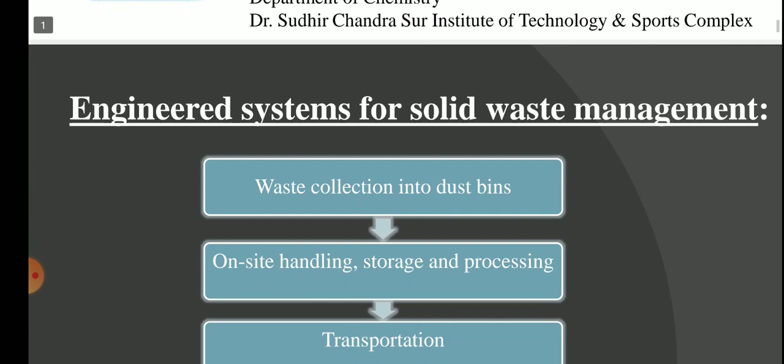So yes, today we will discuss mainly on the composting process, but in sideways we will discuss the other processes also.

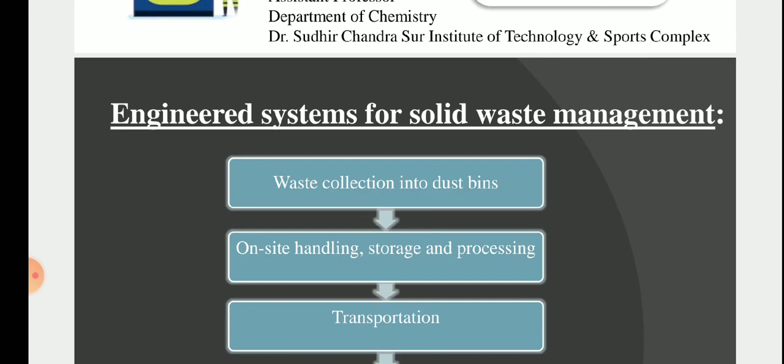So here is the system of solid waste management, that is the steps. First of all, the waste collection into our dustbins, then on-site handling, storage and processing. Obviously the collection and other processing, and they are stored in a particular place.

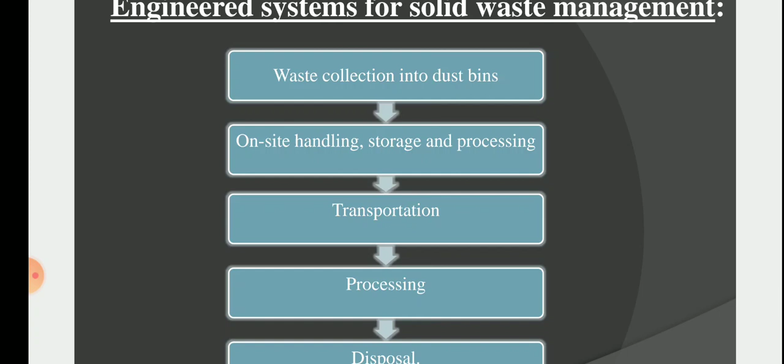Then there will be a separation, and sometimes transportation is required, because if you take it to your processing unit, then processing, and lastly the disposal. So these are the main steps.

Now there are different methods for the treatment of solid waste, or solid waste management. With different types of waste, different treatments are to be done, because organic and inorganic waste material is possible. So yes, we can reuse them, we can dispose them, we can make compost by using them. So there will be different techniques or different types for solid waste management especially.

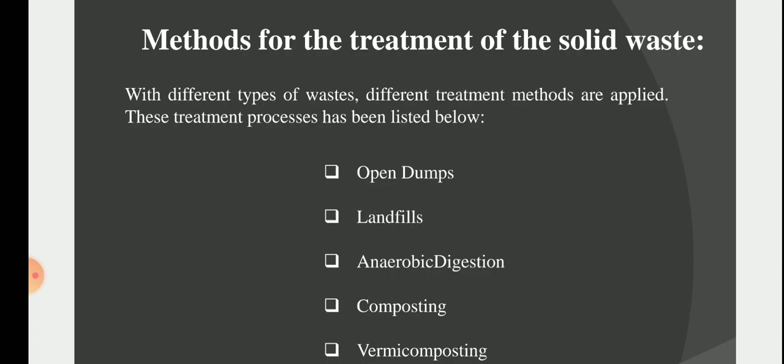Number one is open dumping, that is the waste are thrown in open space, and all the city solid waste are stored at that open space, that is called open dumping. Now second is the landfill.

Here in the landfill, some lower field or low level land is filled with this solid waste. Now another is the composting.

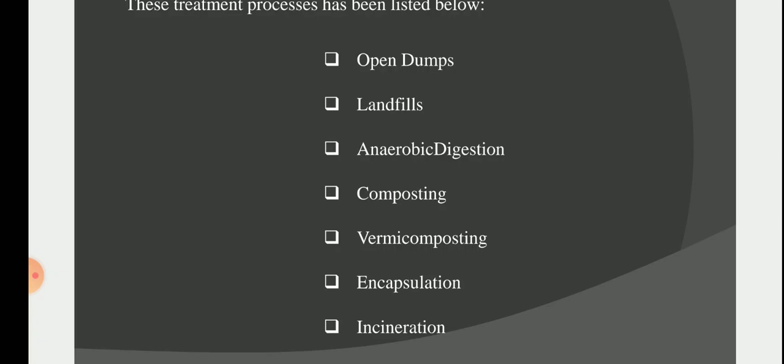Yes, we'll discuss about this. Then vermicomposting, then encapsulation, and the last one is incineration. We'll discuss one by one, and the last one is very important, that is incineration. This is mainly used for bio waste. They are damaged at high temperature, nearly about 1000 or more than that, by using this type of system oven.

Now first we will discuss about open dump or open dumping. So here you will look into the picture, that all city waste products are carried and stored in a particular place, and in our city you know that the Dhapa is that place.

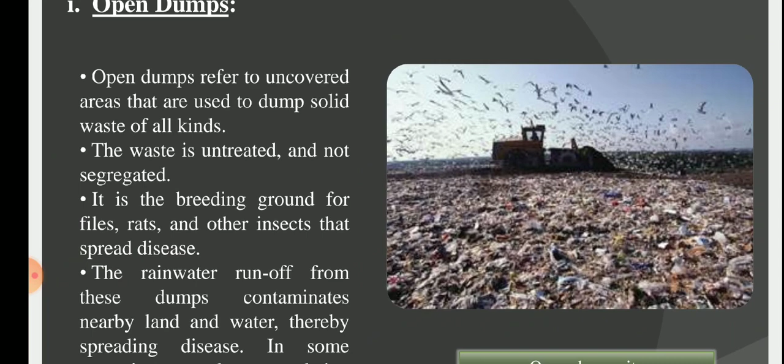So here all the waste material is thrown or dumped in open air, and here no treatment is done. So basically the waste material is not taken care of, or any other processing is not taken. So it is not the right way, student, to dispose the waste.

So here, different kinds of waste are accumulated, organic, inorganic, etc. So this is the breeding ground for flies, rats, and other insects, so that can spread different kinds of disease, serious diseases.

So again, in the rainy season, the rainwater runoff from this dump contaminates the nearby land, and also the water system, the canal and other systems, and then the spreading of disease happens by means of this. So this open dumping is not recommended for a particular city, because it is not a good way. Yes, this is a very fast solution to remove the waste material, but it is not good.

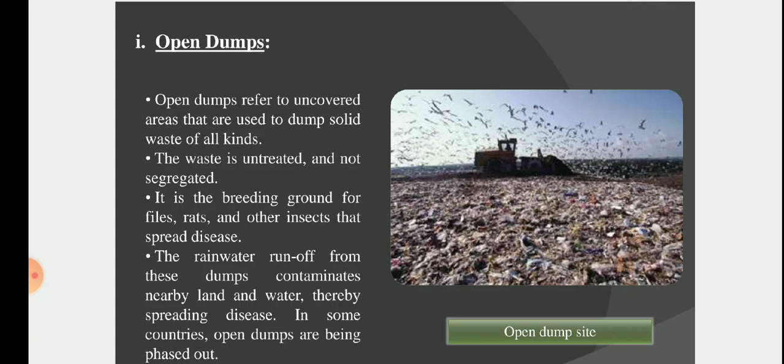Then the landfill. Here we carry the solid waste material and fill a lowland, so the ground can be used for a specific purpose, such as building a house. But again, it is not good, because if you do not segregate the waste material, a number of the waste materials may hamper the environment in future. So you must take care of that.

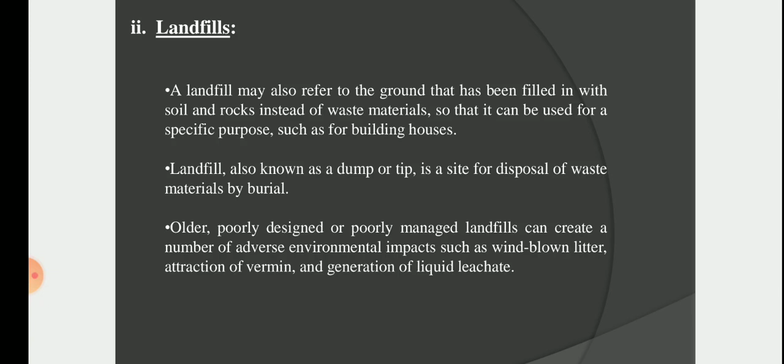So now, landfilling is a site for disposal of the waste material by burial. Basically, we take the waste material to the low land, then put soil above them. Again, I am saying it is not a good process. An older and poorly designed and poorly managed landfill can create a number of adverse environmental impacts, such as wind-blown litter, attraction of vermin, and generation of liquid leachate. Since it is not properly managed, they just cover it up with some soil.

Now this is a very important part of solid waste management, and this technique is maintained in most countries and most cities. This is the green approach.

Composting is the biological decomposition of organic waste under controlled aerobic conditions. Organic compounds are sometimes called biodegradable material. If we place biodegradable material or organic compound, a defined kind of bacteria present in our environment decomposes it. Due to this bacterial decomposition, the organic material decomposes, and if we do this in a controlled way, following an engineering process, we can use it as a fertilizer, that is compost.

Industries such as paper, agriculture, and food processing give out waste which is almost 100% organic, and waste also comes from our everyday life at home. Lots of that is organic product, and it ultimately generates good compost. If you look into the picture, you will see that.

First, here is the carrot. In our kitchen, we use the carrot stem, then throw away the leaves, and it goes to the dustbin. If you segregate this kind of thing—not only this carrot but lots of vegetables that we throw into the dustbin—and collect that organic part, after particular processing it creates this compost. Now we can use this compost in the agriculture field for growing carrots again. So this is a nice recycling process, and it is a completely green process.

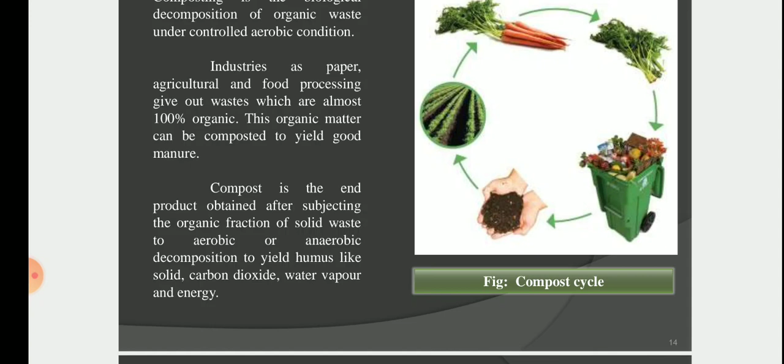Compost is the end product obtained after subjecting the organic fraction of solid waste to aerobic or anaerobic decomposition to yield humus. There will be moisture present in this solid material or soil, along with carbon dioxide, water vapor, and energy. That's why it is called humus, and it is a very good fertilizer.

So what is the process for making compost? There are different stages of composting. First, you have to separate the solid waste—that is, segregation of the solid waste. You remove the inorganic material that is not biodegradable, and separate the biodegradable or organic material. Then there is processing of the compostable matter and preparation for compost, after which it is taken into a container, followed by digestion, curing, and screening.

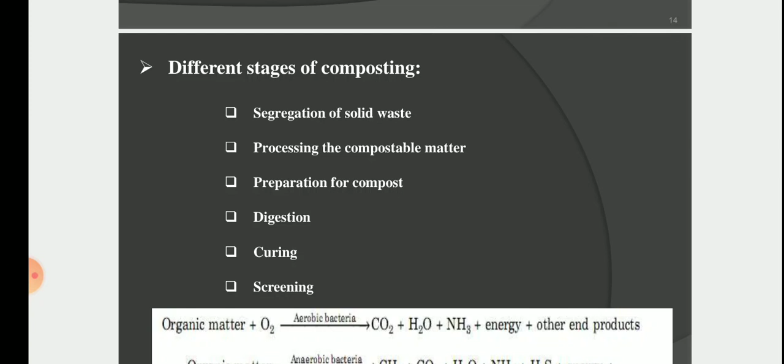Basically, it needs 15 days to 1 month to process this bacterial decomposition. Here, organic matter in the presence of bacteria and free air—that is, oxygen, which should be a limited source—is decomposed. After decomposition of the organic compound, it produces carbon dioxide, water, ammonia, and other gases, along with energy and other products.

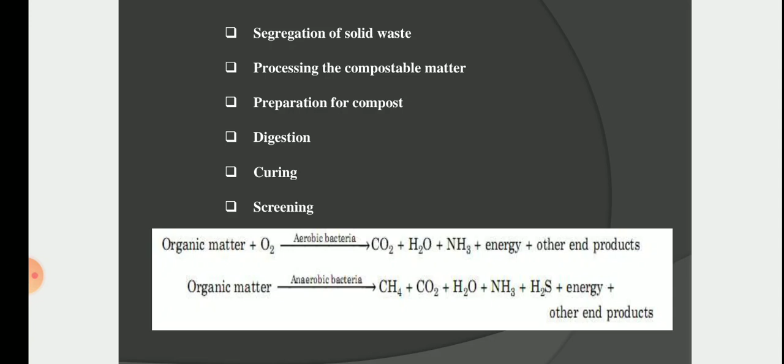These are the chemical processes that occur during the formation of compost. Aerobic bacteria mainly work in this process, but sometimes anaerobic bacteria also take part in this decomposition and also produce compost.

This is the growth of temperature. First, at temperature 30 to 35 degrees it forms a mesophilic material, and at 60 degrees moderate thermophilic, and at 80 to 90 degrees extreme thermophilic bacterium, that is compost. So compost is a very complex process involving the participation of several microorganisms like bacteria,

actinomycetes, and fungi. So mainly bacteria, fungi and other microorganisms take part in this process. The bacteria bring out the decomposition of macromolecules, namely protein, lipid, and other things. So fungi can degrade cellulose and other organic complexes.

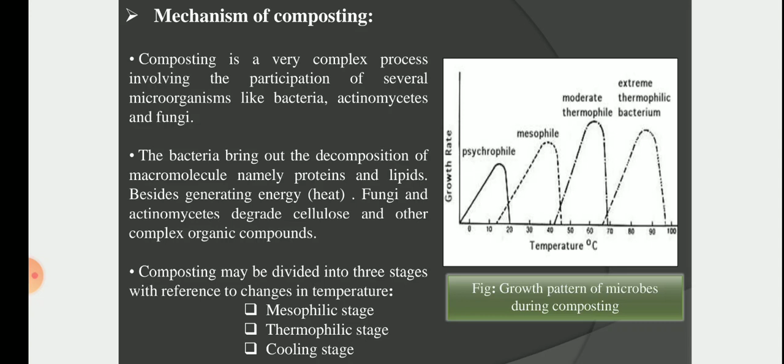So composting may be divided into three stages: the mesophilic stage, thermophilic stage, and cooling stage. Sometimes it becomes heated, and then after cooling we can use it as compost.

Now, anaerobic digestion is a regulated version of the natural event of landfill and other things. So in biogas, it sometimes creates biogas which is a potential renewable energy source. It is carried out in a large fermentation tank, because here a tank is required. Gobar gas is an example.

In this tank, solid waste is taken in absence of oxygen, and anaerobic bacteria convert large organic molecules mainly into methane and carbon dioxide. You know that methane acts as a

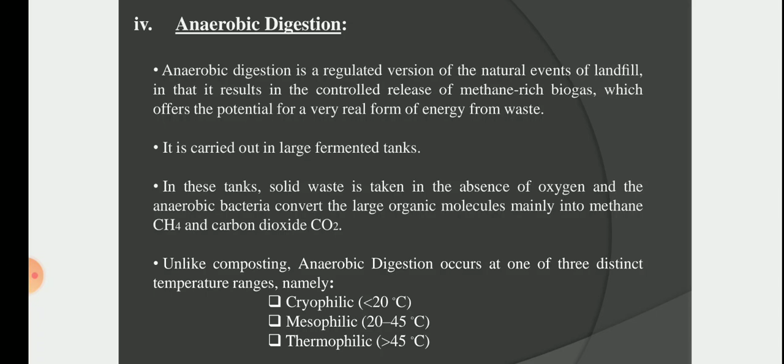gaseous fuel. So unlike composting, anaerobic digestion occurs at three distinct temperature ranges: cryophilic below 20 degrees centigrade, mesophilic at 20 to 45 degrees centigrade, and thermophilic above 45 degrees centigrade.

Microorganisms involved in anaerobic digestion: here no oxygen is required. Hydrolytic fermentative bacteria, so basically here hydrolysis takes place. An example of this type of bacteria is Clostridium. Then acetogenic bacteria, here it breaks the acetyl bond.

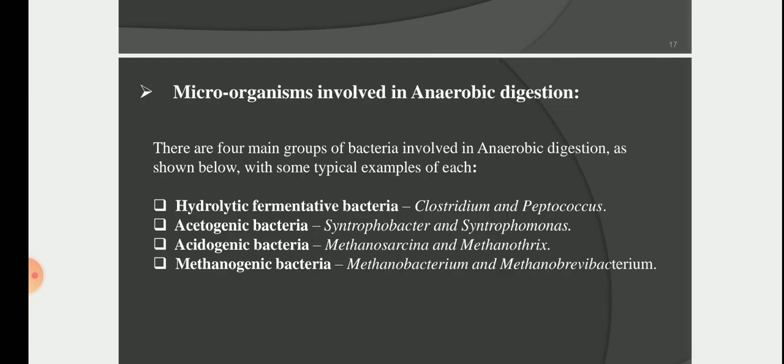Syntrophobacter is another acetogenic bacteria, where some acidic reaction takes place. Methanosarcina and methanogenic bacteria - here methane is produced - methanobacterium. So these are examples of anaerobic bacteria.

So the digestion process is applicable for both aerobic and anaerobic processes. The digestion process mainly involves hydrolysis, acetogenesis, then methanogenesis.

So the complex organic compound, after hydrolysis by hydrolytic bacteria, forms monomers, that is glucose, fatty acid, glycerol.

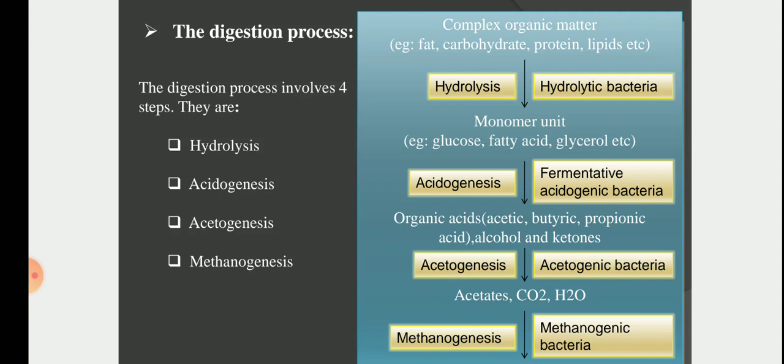Then in acidogenesis, fermentative acidogenic bacteria act, and acetic acid, alcohol and ketone are formed. Then in acetogenesis, acetate is formed along with carbon dioxide and H2O.

Then methanogenesis occurs with methanogenic bacteria, which form methane, carbon dioxide and water.

Another aspect of solid waste management is vermicomposting. Vermicomposting is a simple biotechnological process of composting in which certain species of earthworms are used to enhance the process of waste conversion and produce a better end product.

So it is the same as the above composting. Here we use certain species of earthworms which are used to enhance the rate of formation of the compost, or its quality.

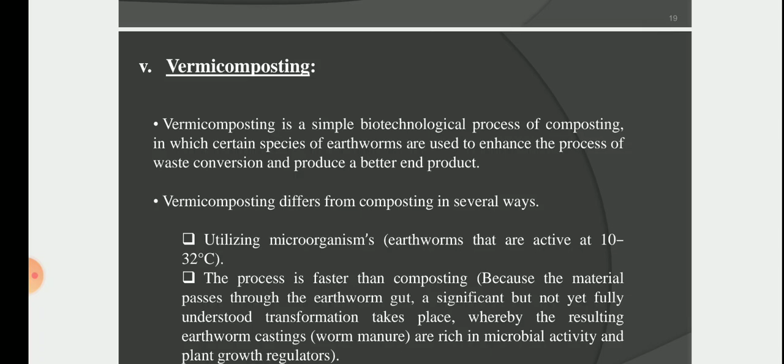Utilization of microorganisms occurs at 10 to 32 degrees centigrade. Then it is similar to that.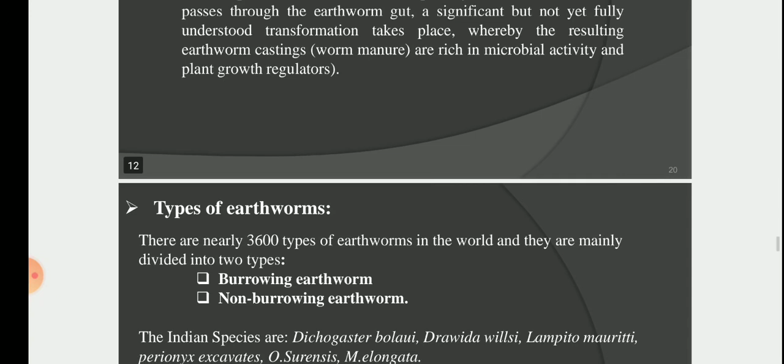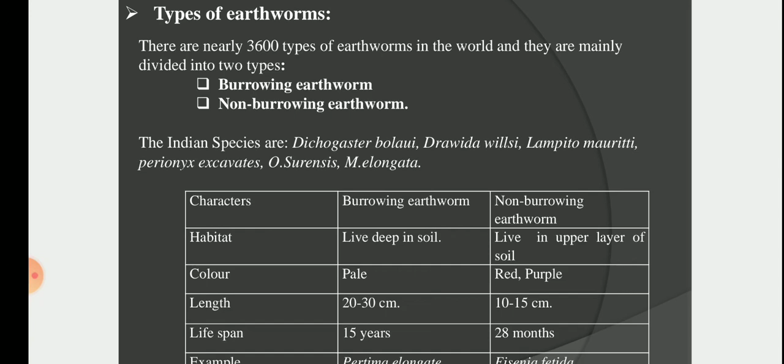Regarding types of earthworms, there are nearly 3,600 types of earthworm in the world. They are mainly divided into two types: burrowing earthworm and non-burrowing earthworm. There are lots of examples you are seeing here.

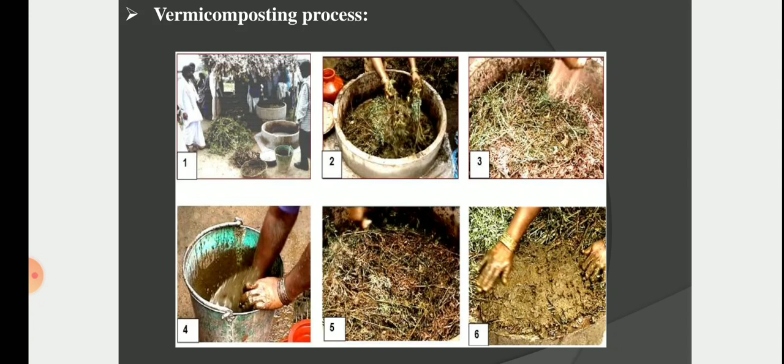This is the vermicomposting process, mainly using cow dung and other things, that is some weeds and other material. From that we can make compost and also get methane gases.

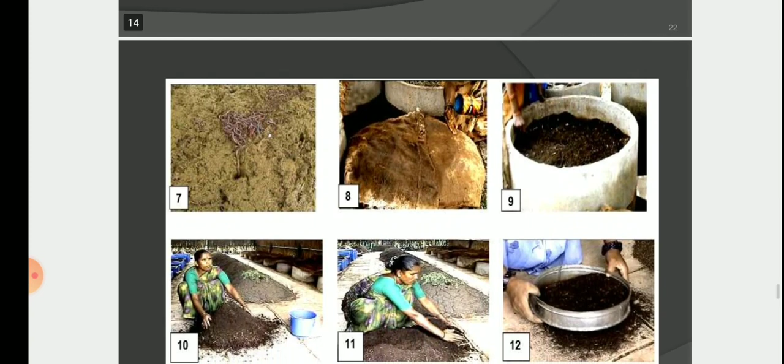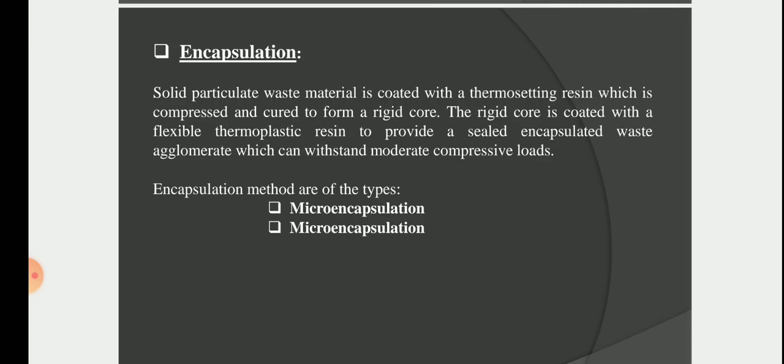So in encapsulation, all the things are taken in a particular container with thermosetting resin, which is compressed and cured into a rigid core.

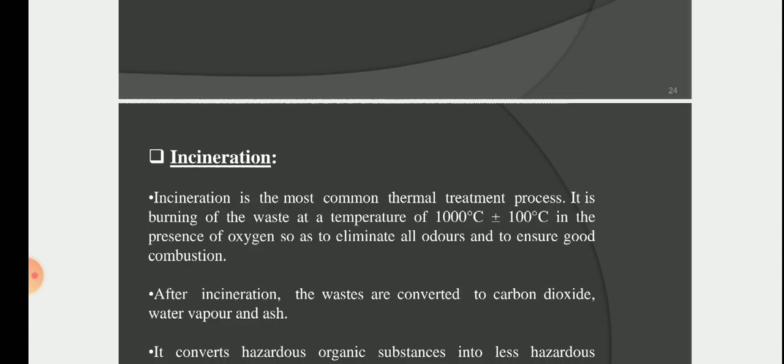Incineration is the most common thermal treatment process. It is the burning of waste at temperature 1000 degrees centigrade. This is very important for bio waste.

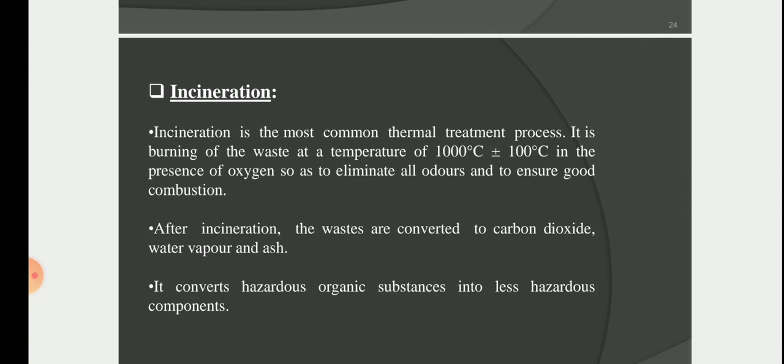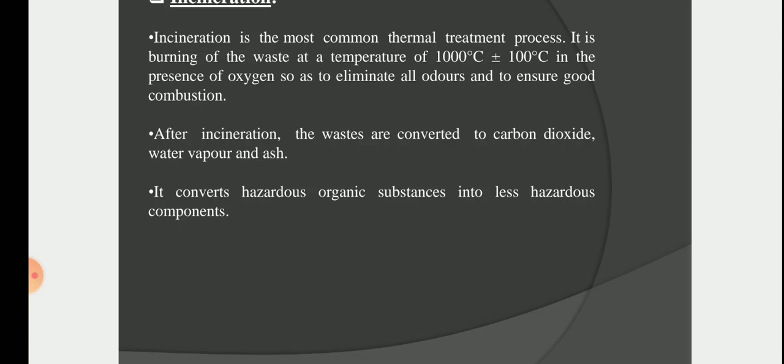After incineration, the waste is converted to carbon dioxide, water vapor and ash. It converts hazardous organic substances to less hazardous compounds. Mainly it kills bacteria, viruses, etc. So it is mainly used for hospital byproducts.